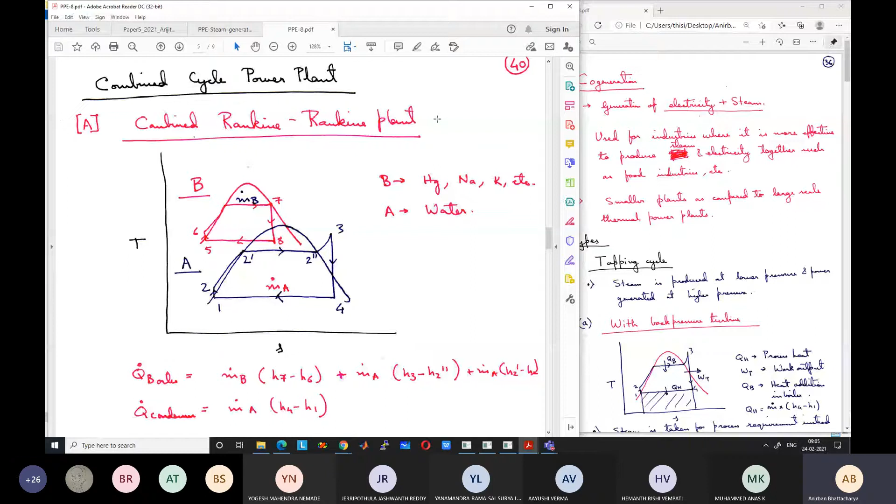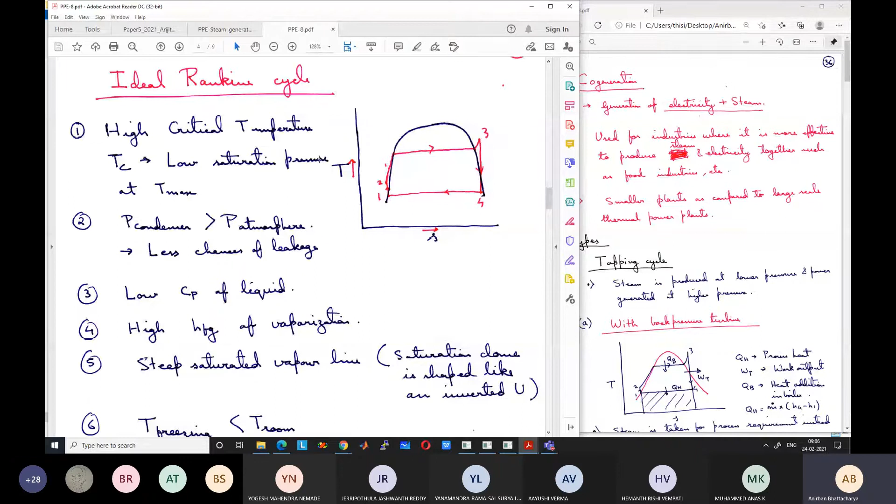Okay, fine. So we had started discussing combined cycle power plants, and we will briefly go through this. What was the advantage or requirement of combined cycle power plants? We saw before what is the typical requirement of an ideal Rankine cycle fluid. Since no single fluid can cover all the points, if you go for a single fluid, then water is best. But if you want a better option, sometimes it is better to go with two separate Rankine cycles, one on top of the other, so that the range of temperature covered is more. For a given pressure range, the range of temperature covered is more.

But obviously this is much more complicated, and you need another working fluid apart from water. So one issue is that it is costlier. Another is that this can be hazardous, there should not be any leakages and other things, so it is much more difficult to handle. That's why for very large scale thermal power plants, this type of combined cycle plant is not used. Although theoretically it is possible, in general these are not used.

Only in steam power plants is steam used as the working fluid, but small prototype plants have been developed based on these combined Rankine cycles. So this is of theoretical interest, but in practical purposes not used very much because of difficulties associated with the high temperature cycle. For example, mercury is poisonous, and sodium and potassium are highly corrosive, so difficult to handle.

So the advantage of using combined cycle plants, we have briefly discussed this part. The advantage is that for the same pressure ranges, you get net heat addition at very high temperature, and heat removal at low temperature, because you are combining two cycles. And how is it done?

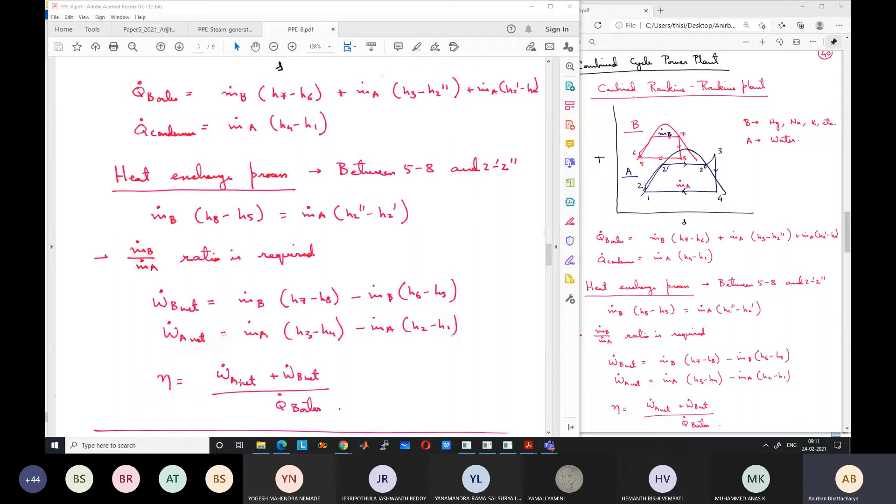Okay, why is only this point from 2 dash to 2 double dash heated by this fluid from 5 to 8, and not the entire fluid from 2 to 3? Can anyone explain? Why is only the part from 2 dash to 2 double dash heated, not the entire part from 2 to 3, using the heat exchange process?

No answers? If we heat from 2 to 3 using the process from 8 to 5, what will be the temperature, maximum temperature in this cycle? It has to be lower than point 8, right? So one point is that this cycle will be at a much lower temperature than the other cycle. So the temperature difference, the 2 dash and 2 double dash points will also be lower. So the difference between this line temperature 5 to 8 and the temperature of 2 dash and 2 double dash and other regions will be much lower as compared to 5 to 8. The temperature difference will be very large, so if heat transfer occurs over a very large temperature difference, then there is more irreversibility.

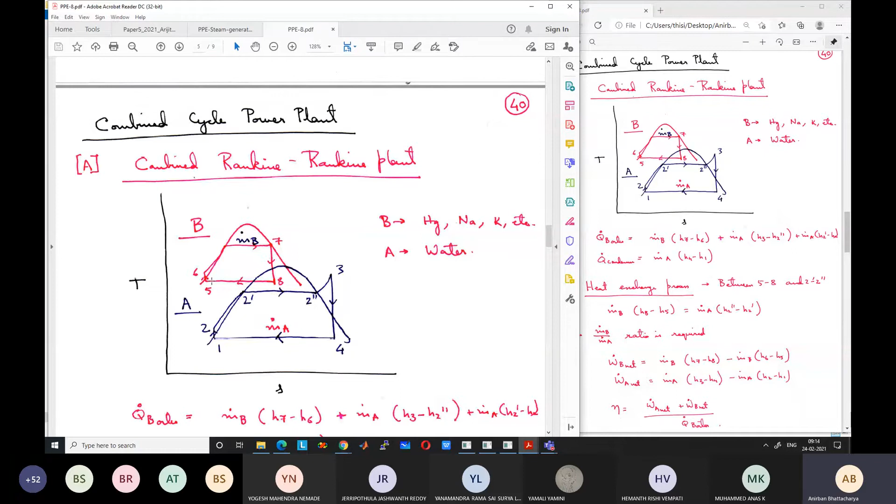You must have studied Brayton cycle briefly in thermodynamics. Have you studied? Do you remember? Anyway, we will go through it very quickly. But in thermodynamics, have you studied Brayton cycle? Yes, sir, basics, sir, basics. So here also we will just study the basic part.

We will not go into details. Details of Brayton cycle we deal with in the gas turbine and jet engines course, which is an elective course in the next semester. But in this course, because we need to study about this combined Brayton cycle Rankine cycle plant, we'll just go through the basics of Brayton cycle also.

So this combined gas, so Brayton cycle means it is the gas turbine cycle, Rankine cycle means steam turbine cycle. This can be combined together, and there is a reason for this, that it is much more suitable. Typically Brayton cycles or gas turbine plants operate at very high temperatures, and the exhaust gas from the gas turbine plant comes out at high temperature, and that is released to the air, meaning that is lost, the exhaust gases are lost. So the exhaust gases contain a very large amount of energy which is not used up, which is just lost. I will explain why this is the case in general.

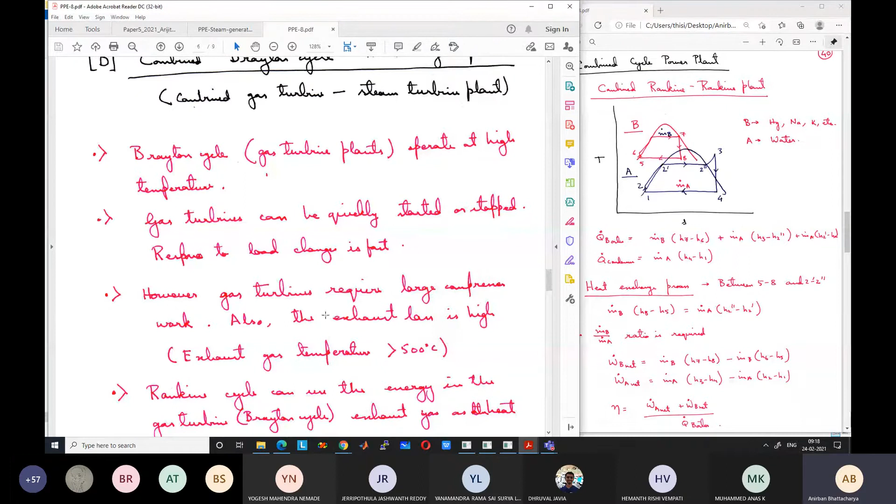Gas turbine plants also require large compressor work, as we will see later, so there are drawbacks of the gas turbine plants. It is not that everything is good for gas turbines.

Rankine cycle can use the energy in the gas turbine exhaust gas as the heat source instead of a boiler. Let us look at this combined cycle plant and also the Brayton cycle, how the Brayton cycle works and how the combined cycle plant works.

We'll keep this image open on this side also. So in the Brayton cycle, there are 4 processes, if you don't remember. I will start with the processes. We will first discuss the Brayton cycle.

From 1 to 2 is an isentropic increase in pressure. In this case, because it is a gaseous fluid, typically air is used in the Brayton cycle. Because this is air, which is gas, we need a compressor to increase the pressure.

Compressor work input is very large as compared to work input in a pump. Why is it the case? For the same pressure increase, the work input required in a compressor will be much larger as compared to that in a pump.

Why is it so? Can anyone explain? The specific volume of gas is very large. Yes, correct, right. Specific volume of gas is very large. So V into delta P, means V into P2 minus P1, that will be very large. And you cannot also use that equation V into delta P directly, because V also will keep on changing.

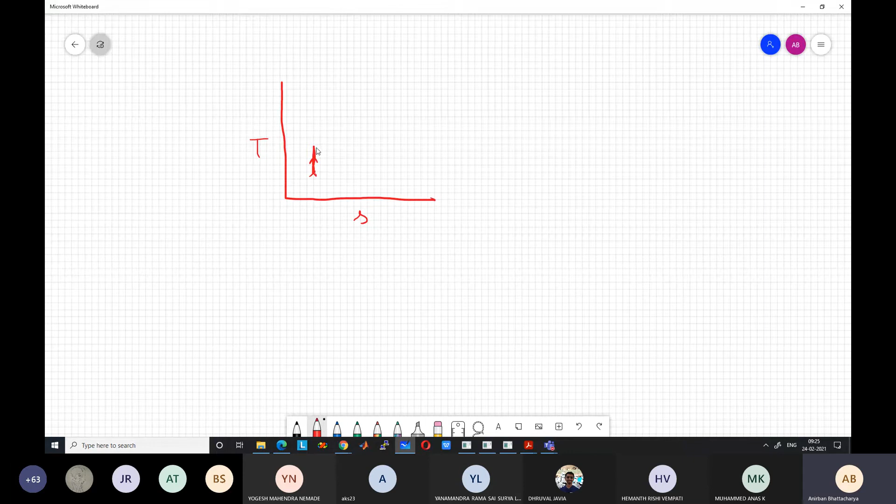So if this is point 1, this is point 2. I will come to how to calculate it. Then we have a constant pressure heat addition, which occurs as a result of the combustion. Then expansion in the turbine.

This is point 4. Point 4 is not related to point 2, so although it looks like it's at the same height, we release the gases at point 4, which is at atmospheric pressure and some high temperature. So if the compression ratio is fixed and the heat addition, the maximum temperature in the cycle, is fixed...

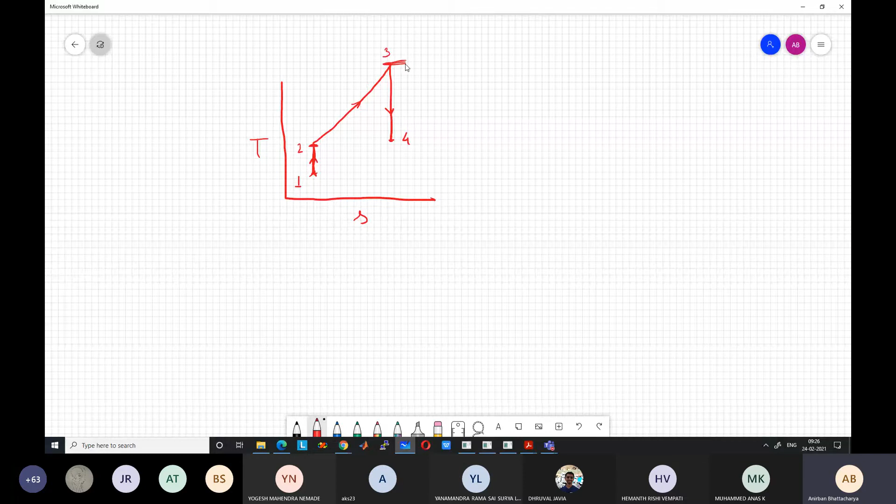Based on what? Can anybody say? How do we fix the maximum temperature, Tmax, in the gas turbine cycle? Is it also the turbine materials?

Yes, correct, it is also based on the turbine materials. For gas turbines, the turbine materials are of higher quality super alloys. So maximum temperature can be around 1200, 1300 degrees centigrade nowadays for modern gas turbines, very large, very high-end gas turbines. These are not only super alloys but are also single crystals, and can withstand very large temperature. So this is fixed.

So if this is fixed and the compressor ratio is fixed, say it is 8, compressor ratio is P2 by P1. This is known as compressor pressure ratio, denoted by R. This is also fixed, generally say 10 or 20, something like that, around that value.

So this point 4, can we reduce it to a lower value? Can we keep on expanding this in the turbine so that point 4 is lower, so that our losses are lower? Otherwise, what is happening is that we are releasing the exhaust gases at a very high temperature, T4, to the atmosphere, and it goes out with very high energy. So can we expand these gases in the turbine more so that we can get more work output and less losses?

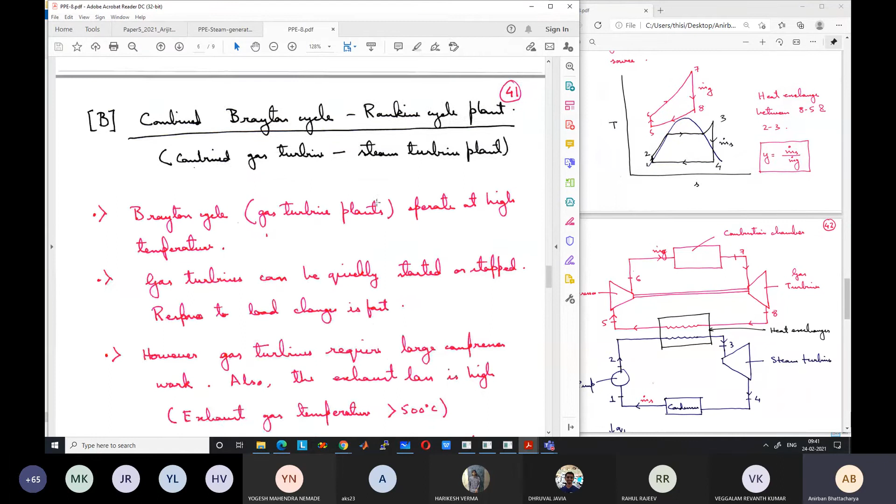The question is, for the combined Rankine cycle plant, we had heat addition from 8 to 5, and this heat addition was done only for the point from 2 dash to 2 double dash. The rest of the heat addition for the Rankine cycle at the bottom was done using a boiler, from 2 to 2 dash and 2 double dash to 3 was done using a boiler. In this case, for the gas turbine Rankine cycle combined plant, the entire heat addition from 2 to 3, including this low temperature region as well as the superheated region, is done using the gas turbine plant. So there is no separate boiler at all for going from 2 to 2 dash, the subcooled region, as well as in the superheated region from 2 double dash to 3.

This region is also heated up using the exhaust gases, we don't need a separate boiler. Why is the heat addition not only restricted to the two-phase region using the exhaust gases, unlike the Rankine cycle plant?

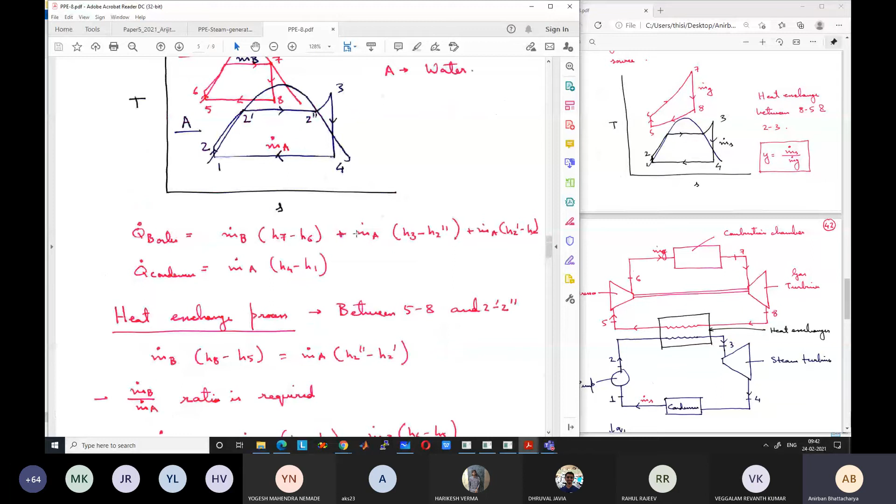So in this Brayton cycle, higher temperature can be reached because the exhaust gas is released, and the exhaust gas temperature does not remain fixed, right? So the heat exchange here occurs non-isothermally. In the Rankine cycle, because of phase change, the heat exchange occurred isothermally, so the temperature during the heat exchange process was fixed. Here, the heat exchange occurs at constant pressure, but the temperature keeps on reducing. So point 8 will be at a much higher temperature compared to 5, and as a result, 8 is higher than the temperature of 3 itself.

So the entire heat exchange can be done from the exhaust gases, and it will not lead to too much irreversibility, because this temperature is also going higher from 2 to 3, and similarly the temperature from 5 to 8 is also increasing. So using a counterflow heat exchanger, we can get a good heat exchange process for this case. The entire heat addition is done using the exhaust gas energy. If Y is the ratio of the working fluid...

If m dot S is the mass flow rate of steam and m dot G is the mass flow rate of air in the Brayton cycle, we can define a parameter called Y, which is the ratio of the mass flow rate of the working fluid, where Y is defined as m dot S by m dot G. So for 1 kg of air, 1 kilogram per second of air, what is the mass flow rate of water? That is the definition of Y.

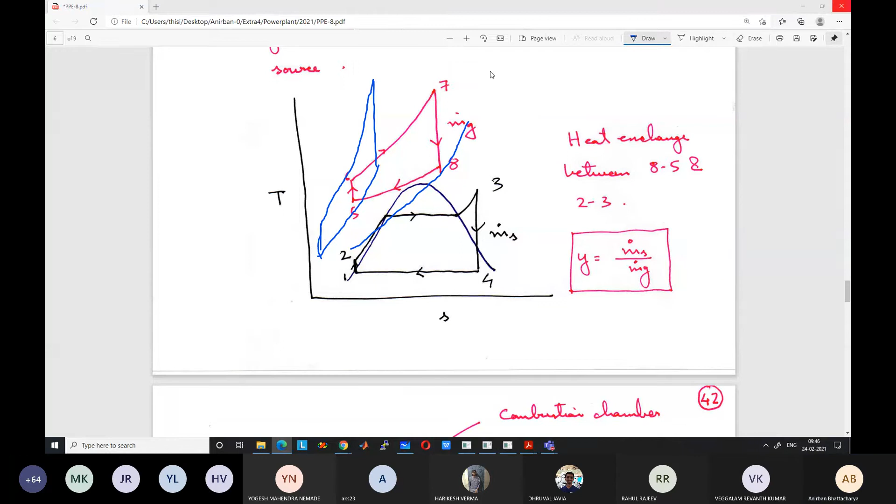Anyway, what I am saying is that this is drawn just so that we can understand — this point can be here also, like this, the gas turbine can be here. My drawing is very inaccurate, but you will get the idea. The entropy at point 5 need not be the same as the entropy at point 1 — this is air, this is completely different; this is water, completely different. It is just drawn like this so that it looks easier for us to correlate. It's a good point that you have raised.

So how does this look like if we draw the component diagram? We have the compressor process from 5 to 6 — let me increase the size of this. Compressor process from 5 to 6, which is isentropic compression. Isentropic means what? Reversible adiabatic. So what is the relation between pressure and specific volume during isentropic compression, or pressure and density?

You should remember all this — these are very fundamental things, and in your entire life these equations will be used. PV to the power gamma is constant, right? Very basic: PV to the power gamma is constant for an isentropic process. Or, P by rho to the power gamma is constant.

So from 6 to 7, then constant pressure heat addition. Heat addition is equal to Cp into T7 minus T6, as we have already studied.

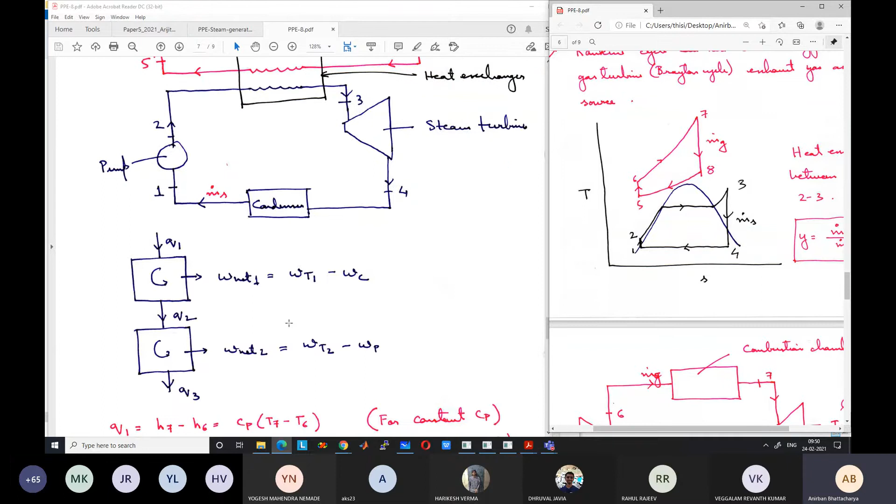So I can also draw a simple schematic diagram looking like this. I will keep this open. Q1 is the heat addition in the gas turbine plant. W net 1 is the work output from the gas turbine plant, which is WT1 minus WC. WT1 is the gas turbine work output. WC is the work input to the compressor.

So net work output is Q1 minus Q2. What is Q2? Q2 is the heat rejected by the gas turbine plant, which is H8 minus H5. This is the same as the heat that is gained by the steam turbine plant. So Q2 is also equal to the heat gained by the steam turbine plant, which is H3 minus H2.

So H8 minus H5 into m dot G will be equal to m dot S into H3 minus H2. Because the mass flow rates are not the same, we have to keep that in mind.

So the same heat addition, the same heat, is taken up by the steam turbine plant. And then we have the net work output from the steam turbine plant, which is equal to the turbine work output of the steam turbine minus work input to the pump.

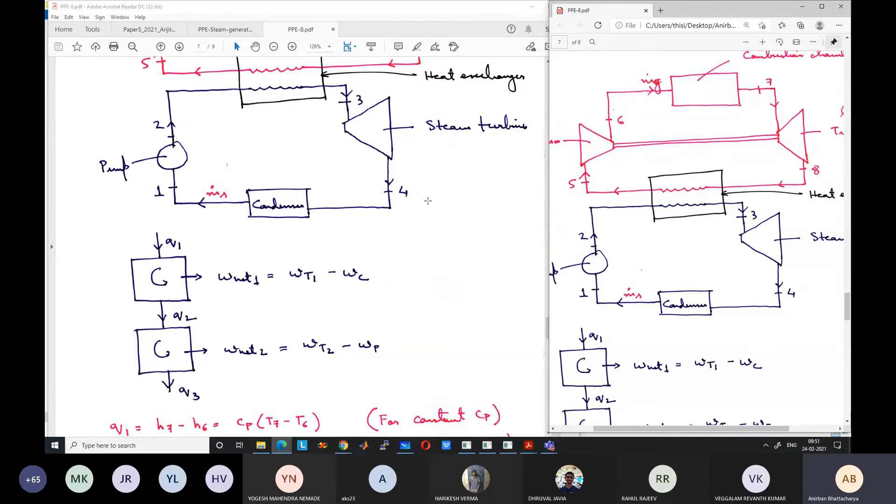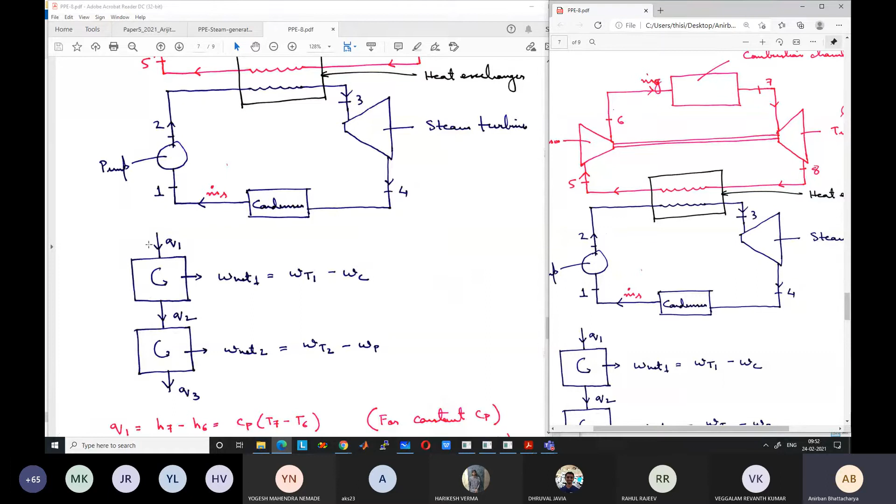After net work output, whatever heat is rejected is equal to Q3, which is H4 minus H1, that is m dot S times H4 minus H1. So the net heat addition to this cycle is this part, and the net heat rejection is this part. This Q2 is internal. So if we combine these two together, we can find out the overall efficiency of the cycle.

Okay, so let us write this. I will keep this open.

What is Q1? H7 minus H6, heat addition in the Brayton cycle, which is Cp times T7 minus T6 for a constant Cp. What is Q2? H8 minus H5, which is Cp times T8 minus T5.

So if we assume that the mass flow rate in the Brayton cycle is 1, these are true. So for one mass flow rate in the Brayton cycle, what is the mass flow rate in the Rankine cycle? It is equal to Y.

So the heat addition in the Rankine cycle is Y into H3 minus H2. Mass flow rate in the Rankine cycle is Y. So Y into H3 minus H2 is the heat addition in the Rankine cycle, and heat rejection in the Rankine cycle is Y into H4 minus H1. So what is the energy balance in the heat exchanger? How will you find the value of Y?

Answers? What is the energy balance in the heat exchanger?

m dot G into H8 minus H5 equals m dot S into H3 minus H2.

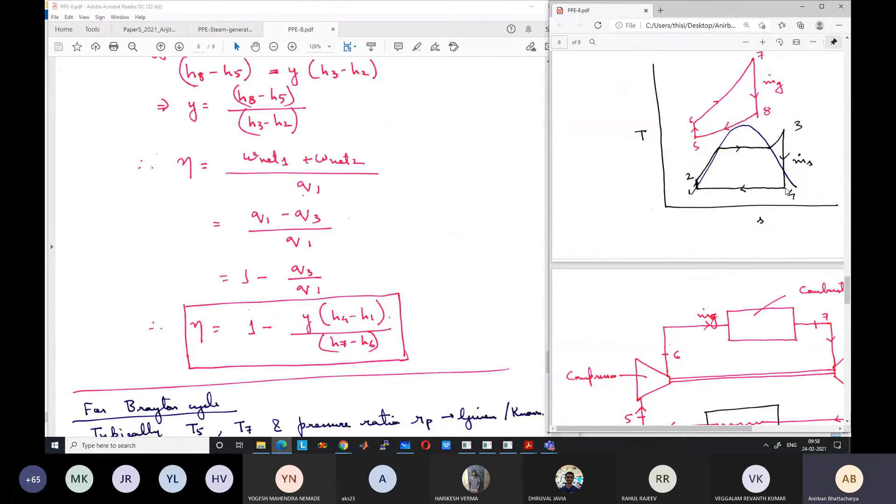This part we already know how to calculate, based on a Rankine cycle, H4 minus H1. We will find point 4 based on entropy being constant from point 3's pressure, and this point's quality, and based on the quality we can find H4. So H4 minus H1 is like a simple Rankine cycle. We will treat this part like a simple Rankine cycle; the only difference is that instead of the boiler you have the heat exchange process. Nothing else has changed. So you can find what is the efficiency.

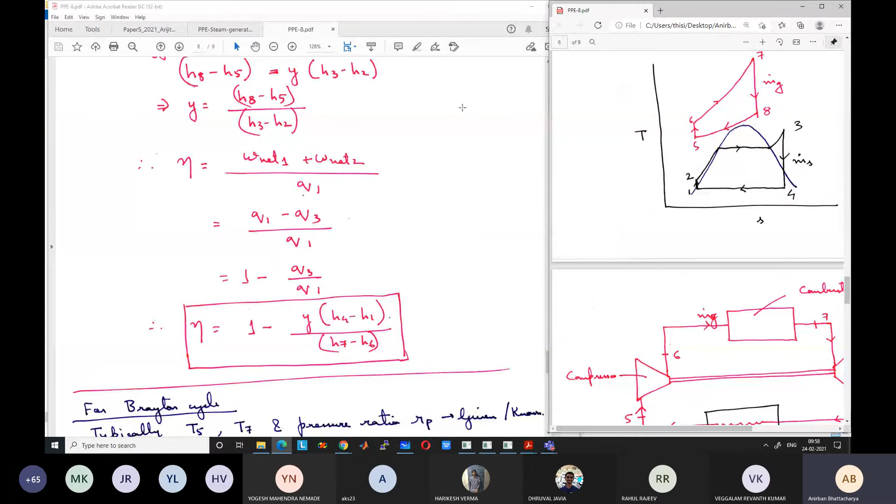For the Brayton cycle, I have already discussed T6 by T5 is equal to P6 by P5 to the power gamma minus 1 by gamma, which is pressure ratio Rp to the power gamma minus 1 by gamma. Or T6 can be calculated as T5 into Rp to the power gamma minus 1 by gamma.

Similarly, T7 by T8 is P7 by P8 to the power gamma minus 1 by gamma, which is equal to Rp to the power gamma minus 1 by gamma. So T6 can be found because T5 is known to us, and T8 can be found because T7 is known based on the maximum temperature in the cycle. So T8 is equal to T7 into 1 by Rp to the power gamma minus 1 by gamma. So all the temperatures are known.

Once all the temperatures are known, all the parameters for the Brayton cycle can be calculated, so we can find out the overall efficiency of the plant.

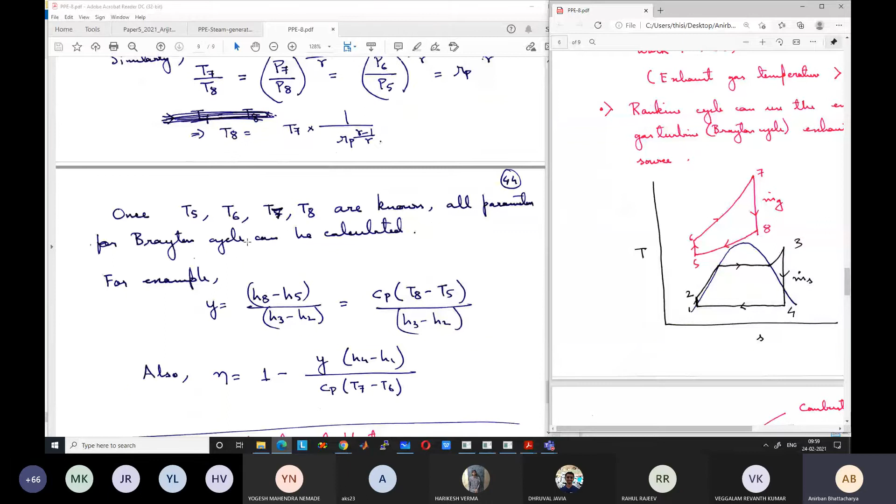For any combined cycle plant where the entire heat exchange from one cycle to the other occurs through a heat exchanger, following this diagram, efficiency is W net 1 plus W net 2 divided by Q1, which is net work output by overall heat addition at high temperature. W net 1 can be written as Q1 minus Q2 by Q1, and W net 2 can be written as Q2 minus Q3 by Q1.

W net 1 is the difference of heat input minus heat output. Similarly, W net 2 is the difference of heat input minus heat output. So efficiency equals Q1 minus Q2 by Q1, plus Q2 minus Q3 by Q1.

This can be written as 1 minus Q2 by Q1. And for the second part, we take Q2 by Q1 common, so the first term is 1 and the second term becomes minus Q3 by Q2, giving 1 minus Q3 by Q2. So what is 1 minus Q2 by Q1?

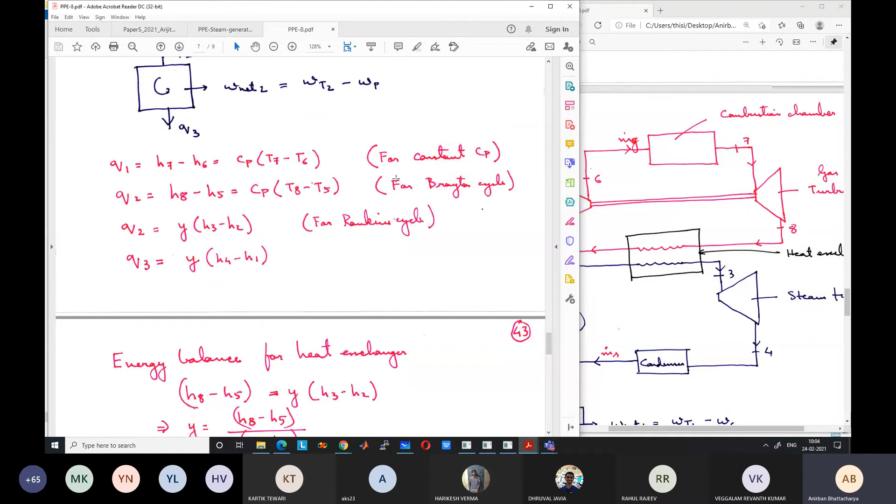This is very easy to calculate. I have given one problem in the assignment sheet, but you'll be able to solve others too, not very difficult. You can go through problems in the books also. For simple Brayton cycle, refer to the book by Cengel-Boles to revise what is the simple Brayton cycle, so you can calculate the heat exchange processes for a simple Brayton cycle.

Rankine cycle we have already studied. I have also noted for the Brayton cycle, but to feel comfortable, you can go to the book once, and then easily you will be able to find out the values for a combined cycle. It's not difficult to find.

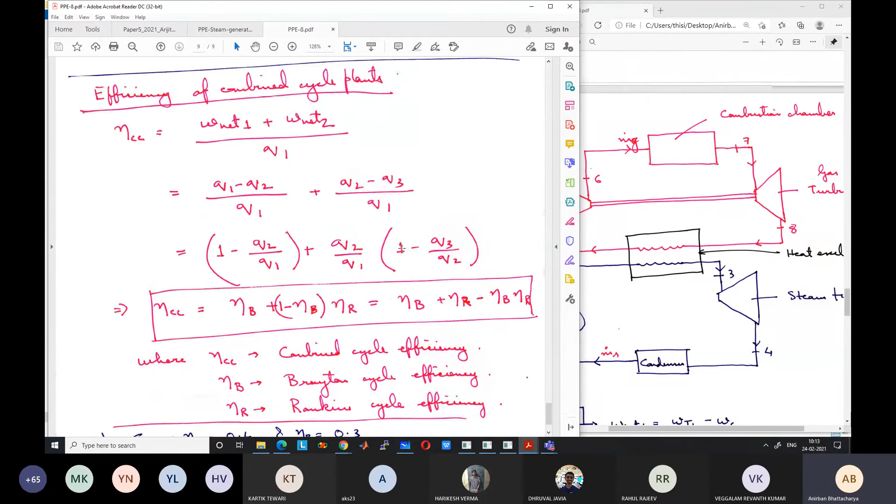Let us go to steam generators. Today I will just give you an overview, and from the next class we will go into some mathematical details of steam generators. There is not much mathematical detail that we can study for steam generators in this course. We will go through some particular aspects which need mathematical treatment. Apart from that, all the other things are just more like a description.

You have to just read from the book, and I will also go through them today very briefly. But I suggest you go through the book by El-Wakil. There is a chapter on steam generators, on the steam generation process. You go through that chapter. Maybe I will give you an official reading assignment also.

So let me see, okay, steam generators, when we consider the steam generation process, can you see the presentation? Yes sir. When we consider steam generation process, basically it is not a single device. It's a combination of a large number of things which ultimately convert the water to steam.

In the thermodynamic cycle, when we study Rankine cycles, we just consider them to be a single process, heat addition in the boiler. But actually that part is one of the major parts of a thermal power plant. You have the furnace, and in the furnace, combustion is occurring. We will see all these things, but I'll just give you a brief overview right now.

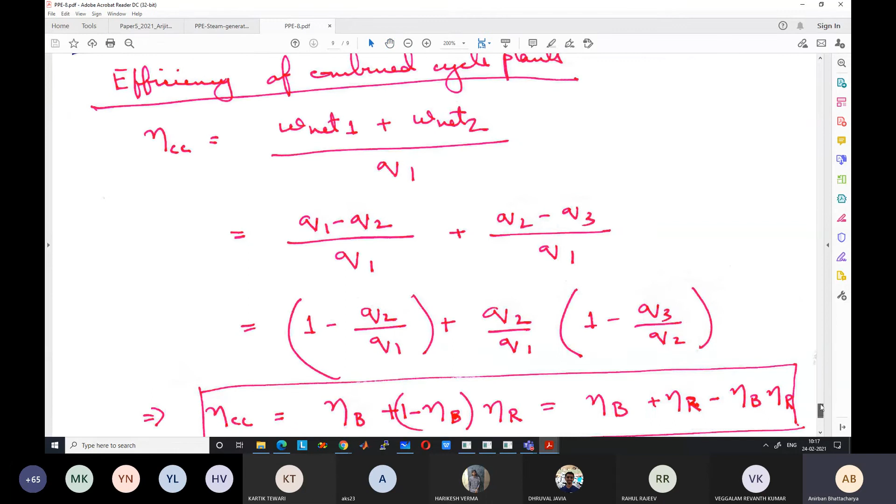So if I go back to our simple Rankine cycle, any diagram will do. Ignore the gas turbine, only consider the simple Rankine cycle part.

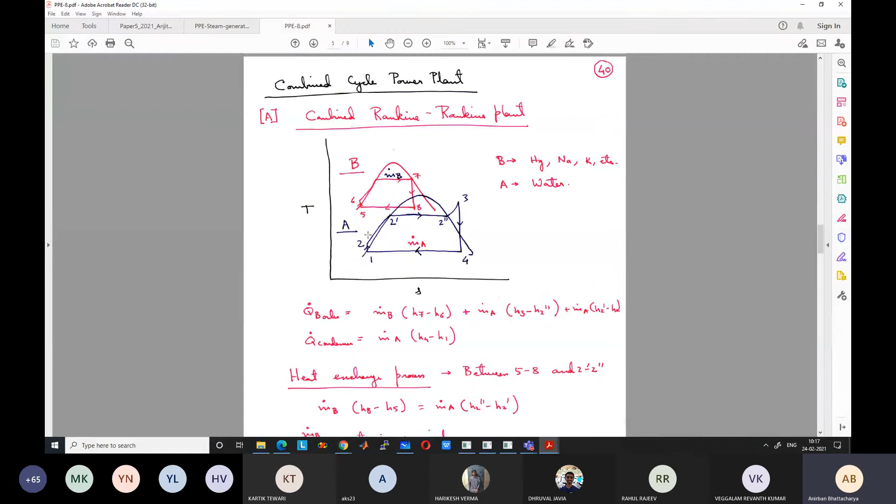Let us look at another cycle. Only consider the lower cycle here, ignore the top one. The part from 2 to 2 dash is known as heat addition in the economizer.

We will see what an economizer is later on. This part is separate in an actual furnace because it considers only liquid water. Point 2 is liquid condition and 2 dash is saturated liquid, so this liquid is heated to saturated liquid condition.

From 2 dash to 2 double dash is the vaporization process. It occurs in the evaporator, also called water walls. This part is separate, and from 2 double dash to 3 is again separate because here the vapor is heated to superheated condition. So these are three separate parts in the furnace.

So that's what we are going to see. First part is heating in the economizer, second part is heating in the evaporator or the actual boiling process, and third part is the superheating process.

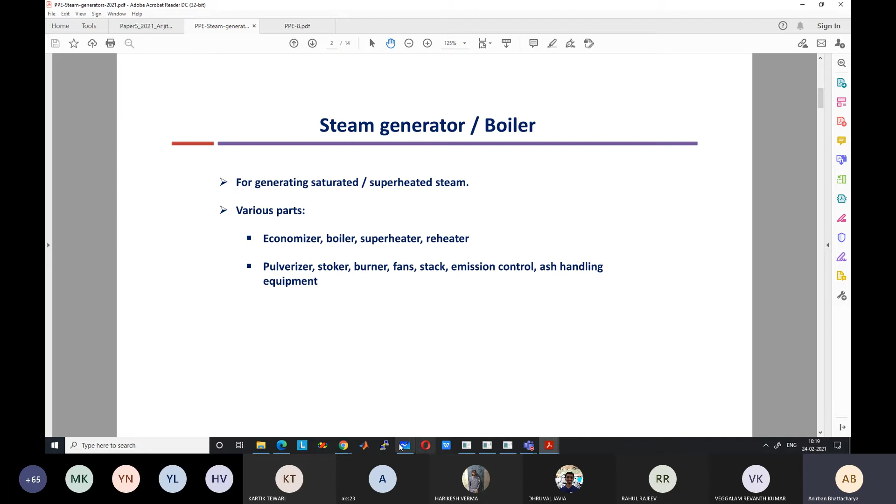Let us come back to our power plant. For generating steam, I will supply this material to all of you. Let me check whether we have uploaded it already. You can also read about these parts from the book.

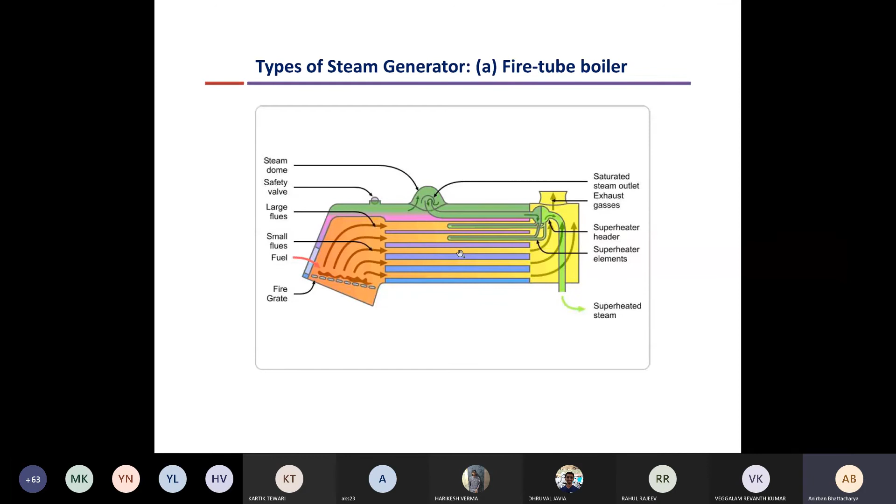So either one fluid has to be in the shell. Initially people thought it is easy to pass combustion products through the tubes, since the design is simpler. But water can just be put in the shell and steam will be generated in the shell like a pressure cooker. Later on modified designs came and were found much more useful, but here you need to pump the water and associated difficulties are there. Still, you can go to much higher pressure.

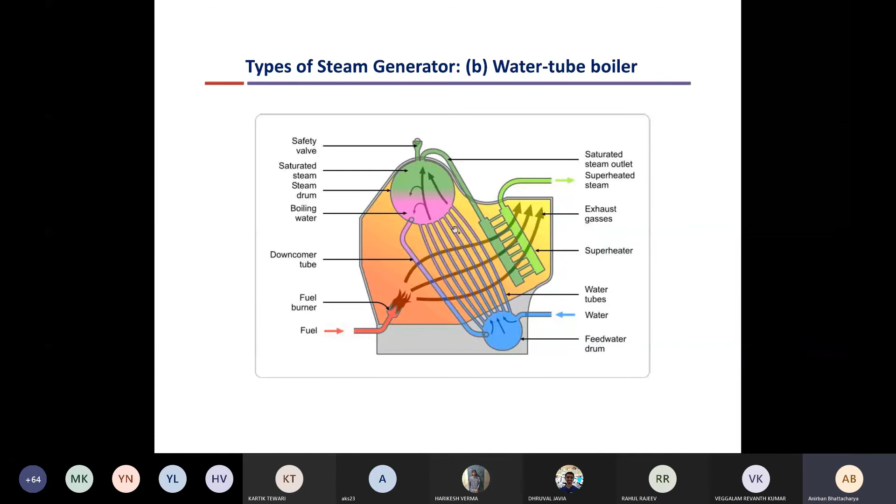If you can go to much higher pressure in a Rankine cycle, what is the advantage? If the boiler pressure is much higher, what is the advantage? Why do we do it at high pressure? What will increase if we can increase the pressure? The efficiency, efficiency will increase. Heat addition will occur at very high temperature, so efficiency will increase. Because pressure is related to temperature, the saturation temperature corresponding to high pressure will also be higher, so you get much higher efficiency. That's why modern thermal power plants have much higher efficiency compared to older plants.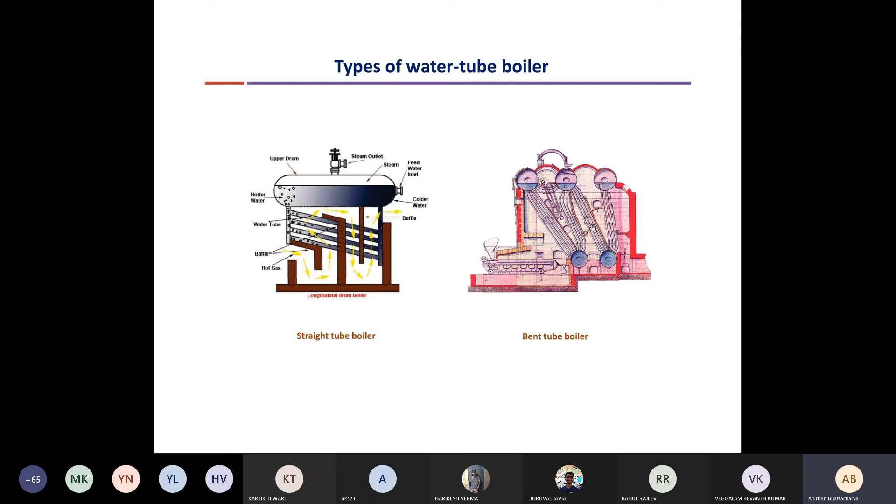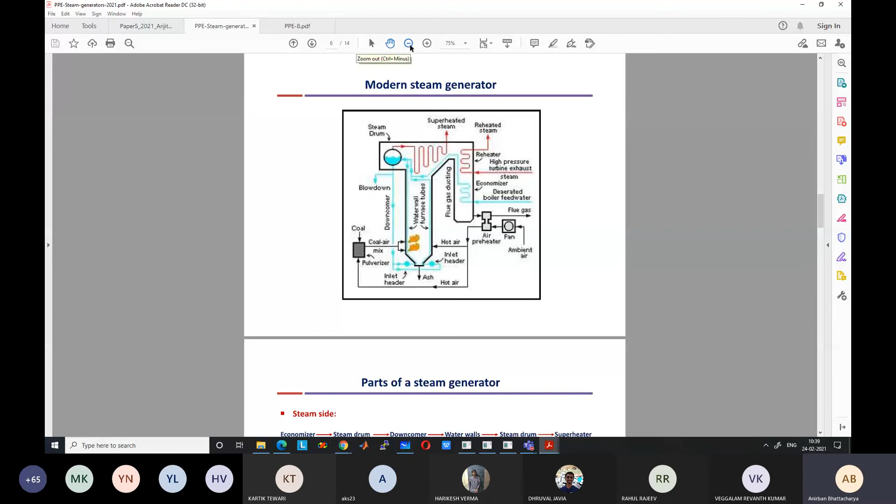So we will come to the modern steam generator. Unfortunately my diagram is very hazy because I got a poor quality picture from the internet, but I will try to explain what happens. In a modern boiler, it is better to reduce the size - or let us keep it large, I will just explain so that you understand, anyway it is getting recorded. The modern steam generator is shaped like a large U-shaped device - it's a very large U-shaped building.

I will go through each individual part. What is happening here: the ambient air from outside is brought and pushed by a fan - this fan is known as the forced draft fan, forced draft because it is forcing the air to higher pressure. Then the air passes through a heat exchanger and exchanges heat with the exhausting gases, so the air gets heated, around 100 degrees centigrade above ambient condition.

So this heated air is now divided into two parts - one part directly goes to the furnace, the second part of hot air is passed to a device known as the pulverizer. What is this pulverizer? The pulverizer is a device which pulverizes the coal, crushes the coal. The coal is brought from its storage space - it is not shown here in this diagram.

The coal is brought from its storage space using conveyor belts and put through large crushers. This crushes the coal into smaller chunks, and then it is pulverized using rollers into very fine dust.

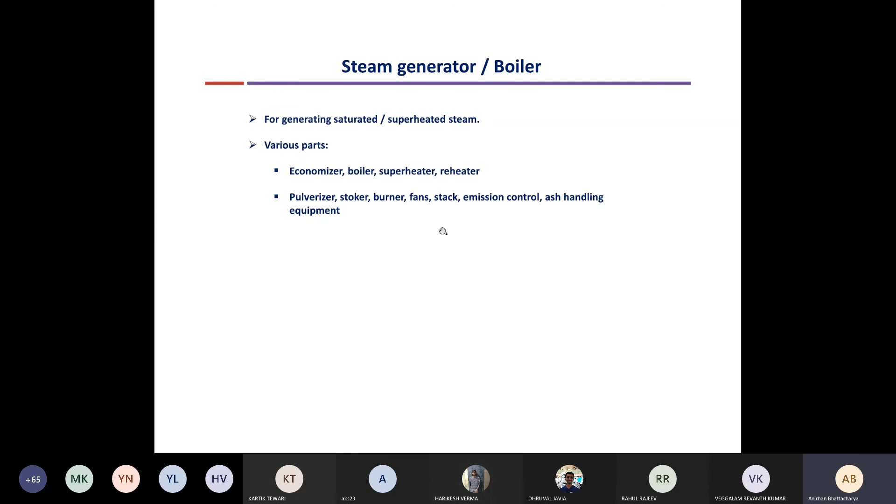So apart from this, what happens during combustion? Some part of the coal contains impurities and cannot take part in the combustion. This part results in formation of ash, which is the incombustible part. Around 5 to 10% of the coal does not undergo combustion.

Some part does not take part in the combustion and drops down as ash. This is known as bottom ash; it drops down and is removed using ash handling equipment, and can be used for landfilling or other purposes. So this is for the air side.

So this is for the air side. Any questions? Yes. No, sir.

So what happens on the water side? The water comes in from the feed water heaters. We have studied about thermodynamic cycles now, so we know the water comes in from the feed water heaters at a moderate temperature, but it is still in a subcooled state.

It needs to be heated to the saturated liquid state, so it passes through a large number of coils held within this furnace, with heat exchange occurring with the flue gases. Because this temperature is lower, this part is present towards the exit of the gases, where the gas temperature is significantly lower, but there can still be sufficient heating.

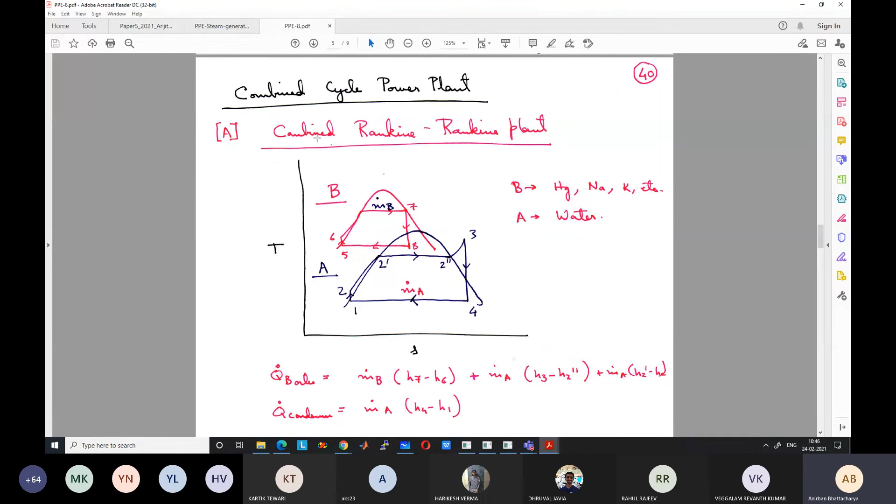So as a result, you need gases to be at much higher temperature so that heat exchange can occur in the superheater. But much lower temperature gas can also do the heat exchange in the economizer. Okay, is it clear to everyone?

So the first device present in this path is the economizer. It exchanges heat with the last part of the gases, before they go to the air preheater. So after this economizer process, the water is at saturated liquid condition.

The saturated liquid is passed to a large drum. This is known as the steam drum. It contains a mixture of saturated liquid and saturated vapor, so it's actually in the two-phase region. It contains a mixture of liquid and vapor. What will be the temperature of this liquid and vapor in the steam drum?

What will be the temperature? I am not asking the numerical value. I mean, how can we find what will be the temperature in the steam drum?

If the boiler pressure is known, then the saturation temperature. It is the saturation temperature corresponding to the boiler pressure.

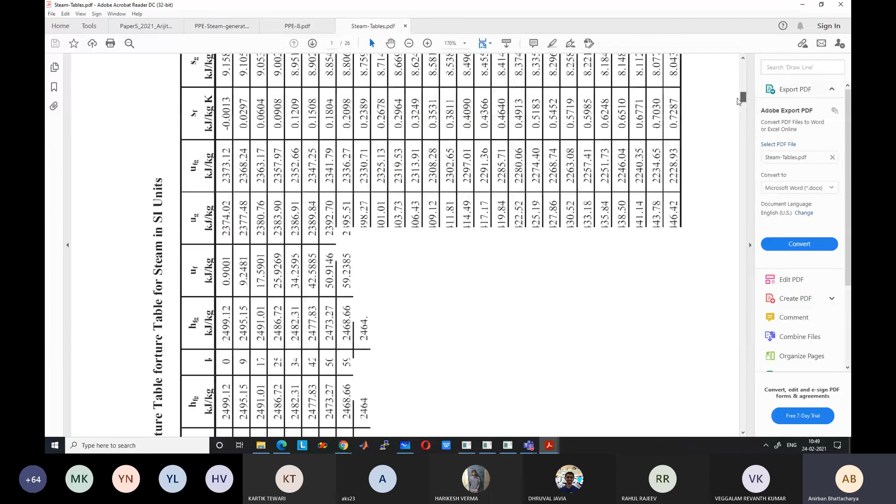So actually it is quite large. It is 342 degrees. If it is 15 megapascal, 150 atmospheric pressure. If it is 100 atmospheric pressure, then it is 311. Just less than the critical temperature.

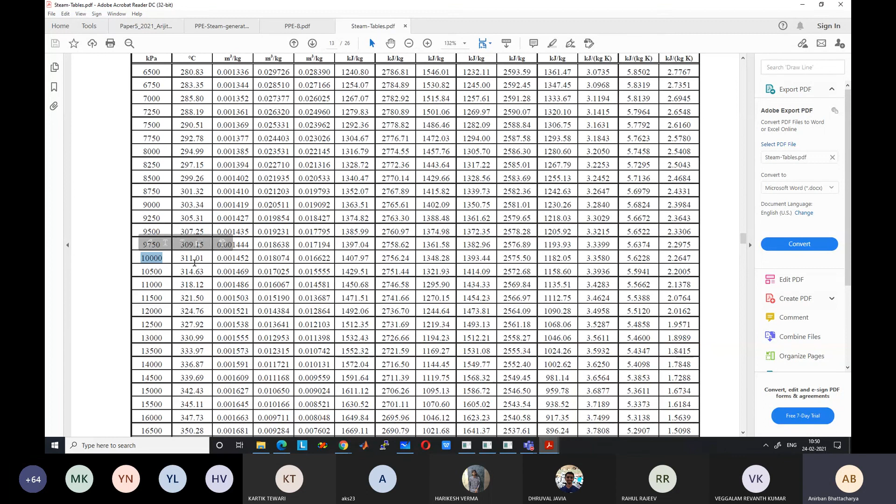So sometimes keeping values in mind is better, because then we get an idea about the real life scenario, the typical values involved in real life. Otherwise, it becomes very hypothetical.

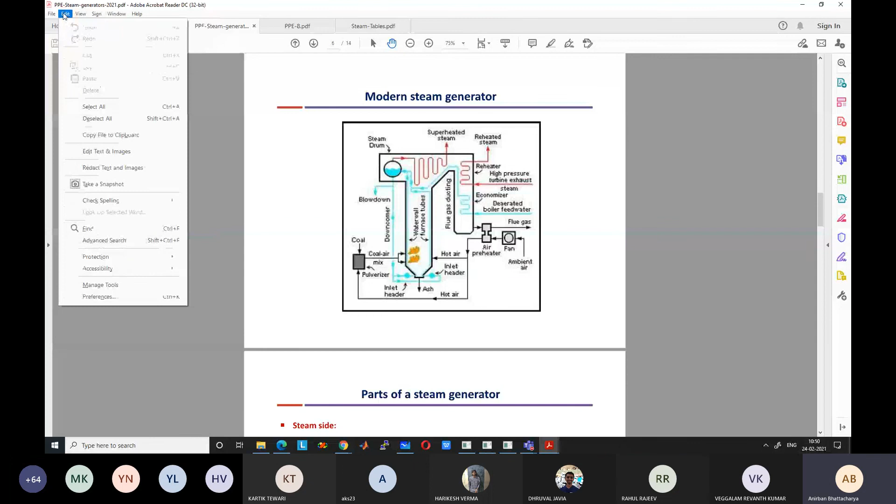So then from the steam drum, the water flows through tubes which are outside the furnace. The water is at around 310 degrees centigrade or 340 degrees centigrade, whatever we found, and it flows down through this outside part. It will be in saturated liquid condition because there is no heating outside the furnace wall, so it just goes down and then is passed back through the inside.

So there are large numbers of tubes lining up the wall of the furnace. These are known as water walls, large numbers of tubes lining up the walls of the furnace.

So the water is pumped back, and because of natural convection also, the water rises in these tubes. There can be small pumps, or there may not be pumps if the natural convection is sufficient. Why does natural convection occur? Because once heat exchange occurs with the furnace gases, some of the water gets converted to vapor, and the mixture of vapor and water is lighter, so it tries to rise up.

This part is also known as the riser, or water walls. In the downcomer, the water comes down - the outside tubes are known as downcomer - and through the riser, the water rises up, and it exchanges heat with the hot combustion products due to radiation and convection.

After this, some part of the water gets converted to vapor, not the entire part. This two-phase mixture comes to the steam drum. The liquid water settles at the bottom and the vapor settles to the top, so if we just take an outlet from the top, only the vapor can be taken out, at saturated vapor condition.

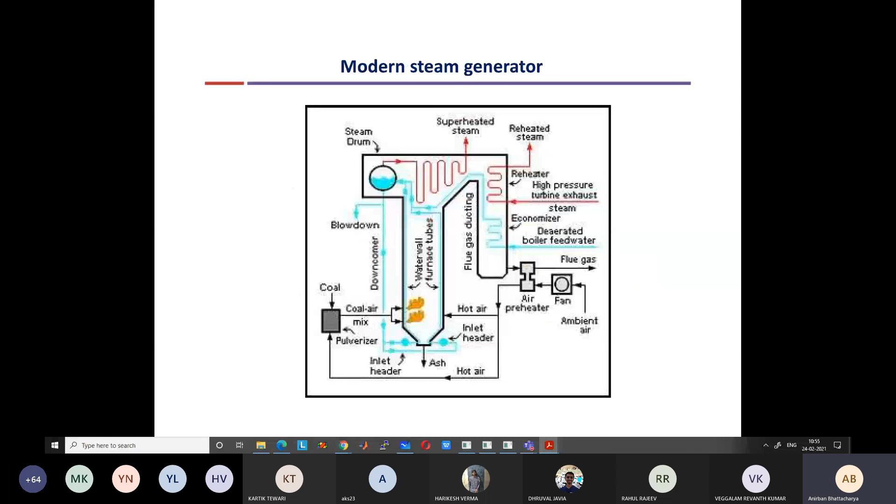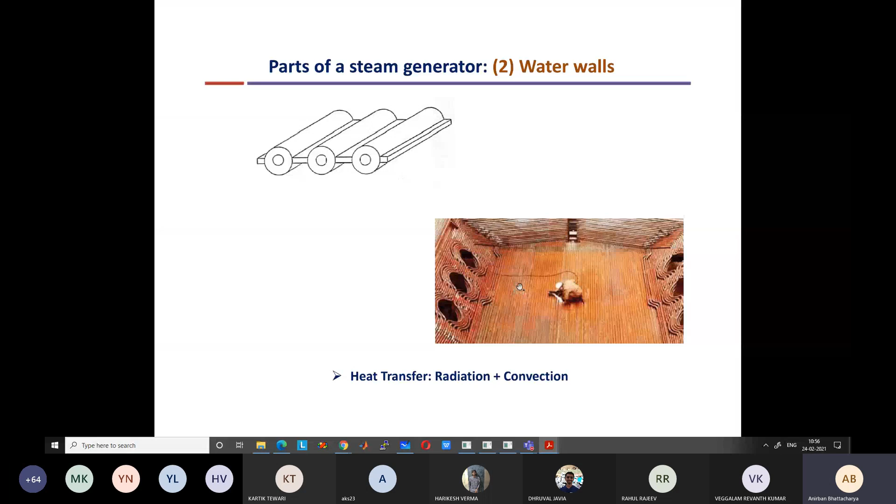We will discuss all these things in the next class. Steam drums are also very large, huge devices. Superheaters and reheaters, then air preheater - all this we will discuss in the next class.